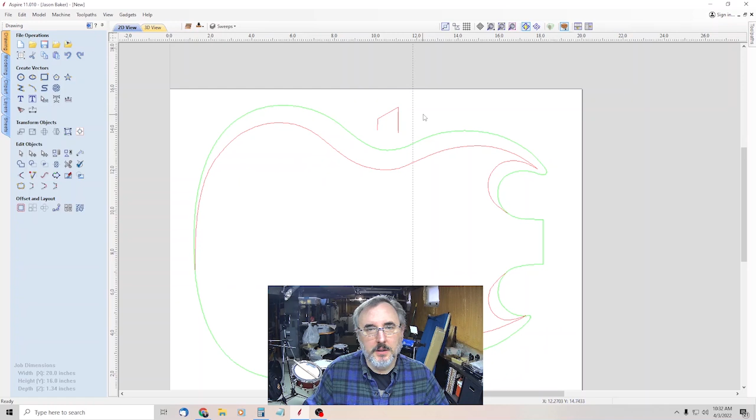If you remember in our last quick tutorial, what we did was take this cross-section profile and sweep it between these two rails. We had this type of shape, and then another shape with a much steeper angle, more like this.

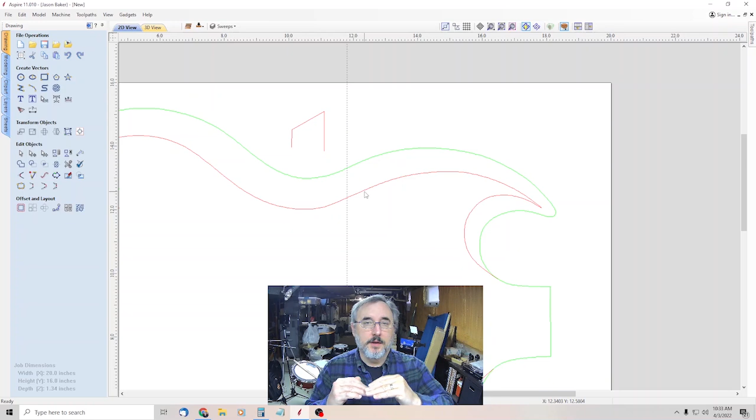Well, as it turns out, we don't even need that. What we're going to do is create another set of rails, but a little bit bigger, a little farther out from the edges. That pushes your 3D contour out farther so there's almost a margin. On the outside, that margin gets cut away and you get a nice smooth edge. Then on this side, we're going to create a little flat spot on top of this cross section and raise everything up a bit, and that will almost eliminate the tool mark.

So what we're doing is coming in more gradually this time with the tool, and it's even going to fix the ends here that were a little messed up at the start and stop in the last version.

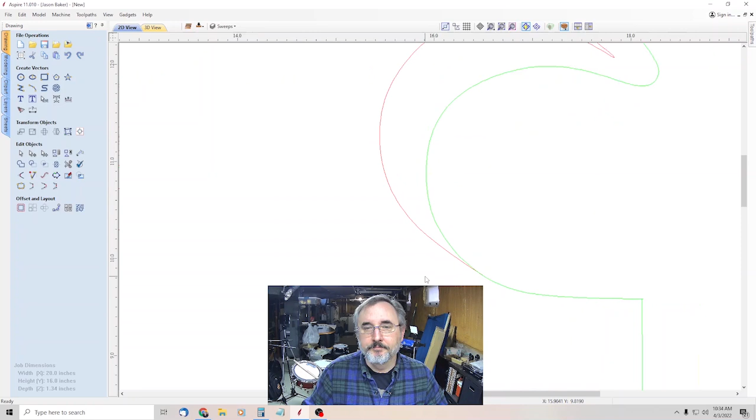Okay, so I've got my rails here. I'm going to turn off the outline so we just have our rails. I'm just going to do the top two again like before. Okay, now you got two separate. So now you come back over here to offset.

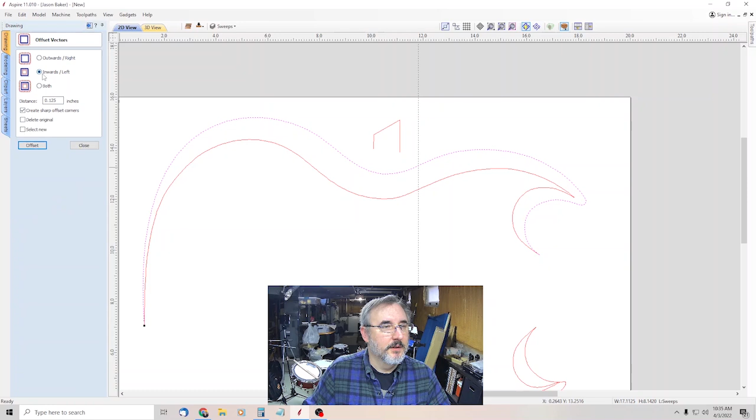I think you want to go outwards on this one. Nope, that's inward. It's strange, it can be confusing - you'd think that would be inward, not here, but apparently it thinks otherwise. So we're doing a 1/8 inch offset. Basically it just creates a new line. Then here, I think we need to do an outward offset.

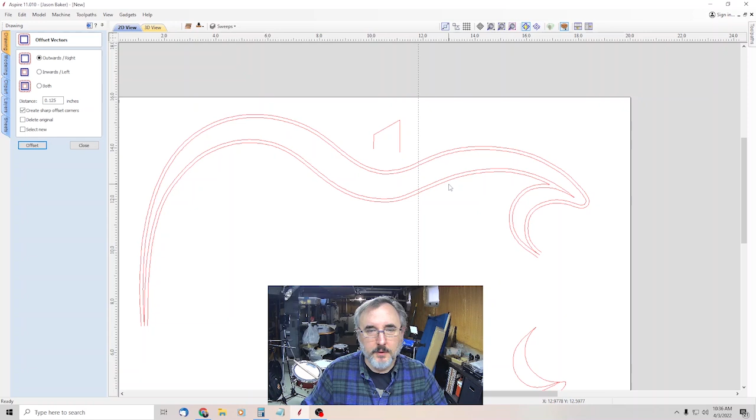Yep, okay, so what you've done is created two new lines to sweep between. You could even get rid of these if you wanted to, but I usually move stuff to another layer just in case I need it. So let's bring the outline back in. Then what you want to do is see where there's a huge gap here, but you want these to meet the outline.

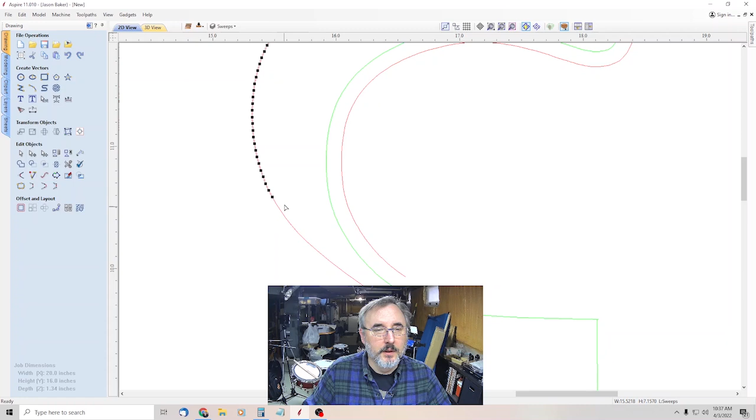What I ended up doing was - click here, you notice there's a lot of nodes, we're going to remove some of these. We'll cut vector, do the same thing here, right about there, cut vector. Because these curves, on this particular file I got from the PDF off of Electric Herald, are made up of a bunch of straight lines. But for this end part, we want to create a nice 3-point arc.

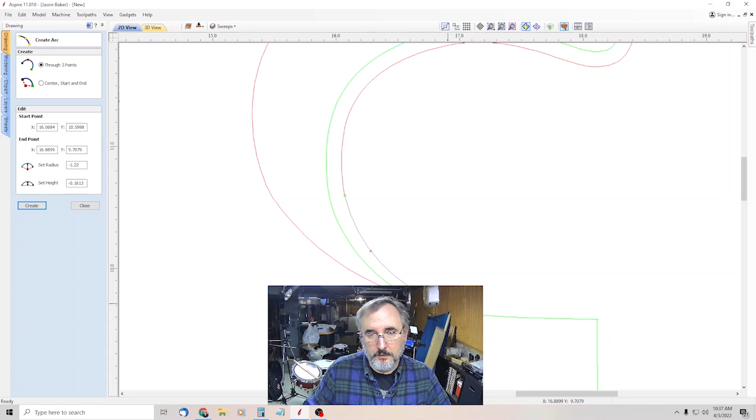So we're going to come right about there, and you want your end point to meet - see how these two end points meet. And then we need to stitch, join these together. So we'll join them.

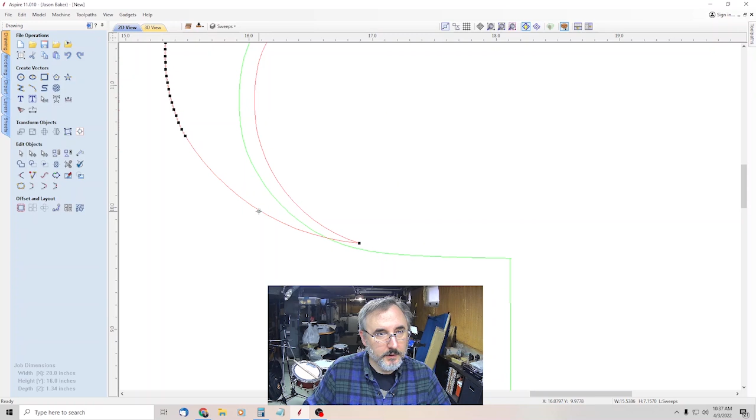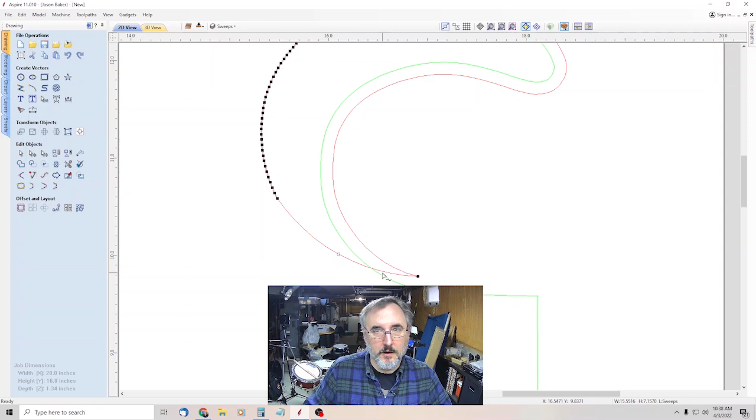This one's got a bit of a hard angle there, so we'll come out a little farther. Then this point, you actually want to push out a little farther, because I found that if this point is out right about there, it'll be cleaner - it'll start out here and then come in, making the beginning of this arc a lot cleaner. So that should be out quite a ways.

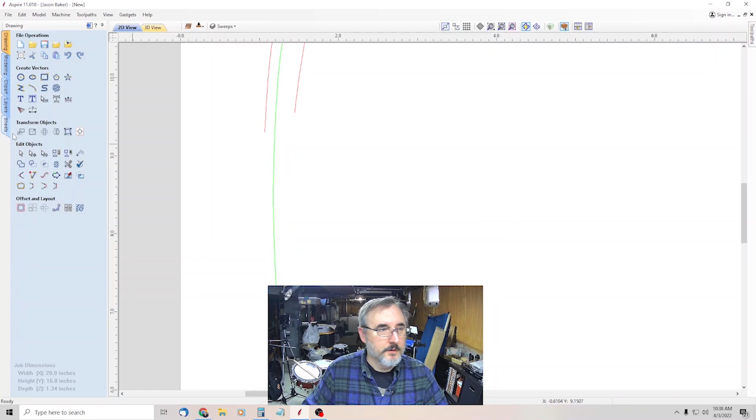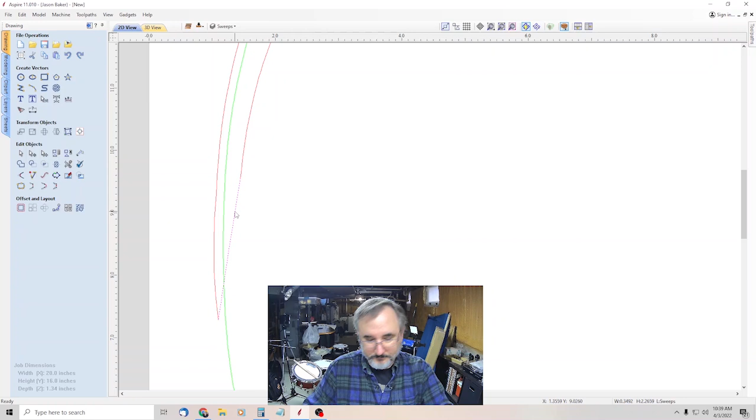Okay, and then you do the same thing on this side. We're going to cut these vectors off a little ways so we can insert a new 3-point curve, which will be easier to work with and cleaner. We're going to come right about there on that side. Actually, that should probably go up farther - I think we should go up farther because we want this curve to be nice and easy, nice and gradual. So we're going to come up here and cut a little more, because we want to come in right about there.

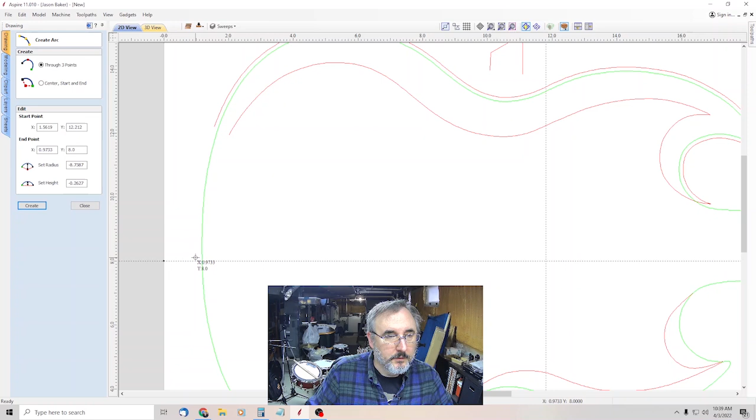So now we can grab our arc tool. We're going to end outside of this, and we can bring this in. That's the nice thing about the 3-point arc, when you want to move the beginning and end points. Okay, that looks pretty good, looks pretty smooth.

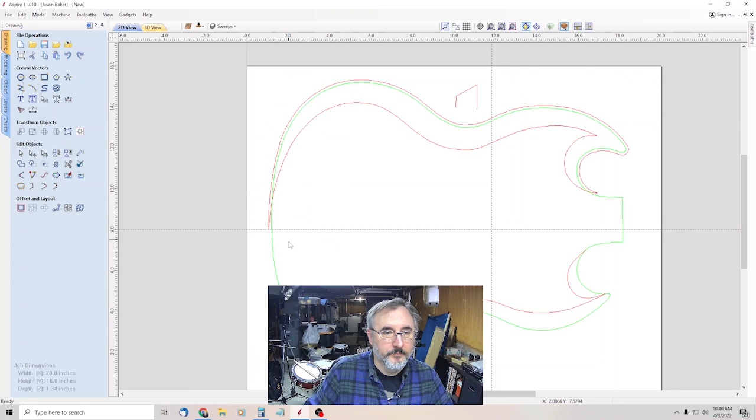We want to make sure these two are joined, and we do the same thing here. We're going to want to come outside of this, to here, snap - see, that's pretty good, a nice smooth arc. We'll join these two. So this falls outside and that falls outside.

See how this is where your body contour is going to cut, and your 3D contour will actually bleed out of there. So when this cuts, it'll have a nice sharp edge to it. Then another thing we want to do is our body thickness is almost 1 and 3/8 inches, so we're going to create a box.

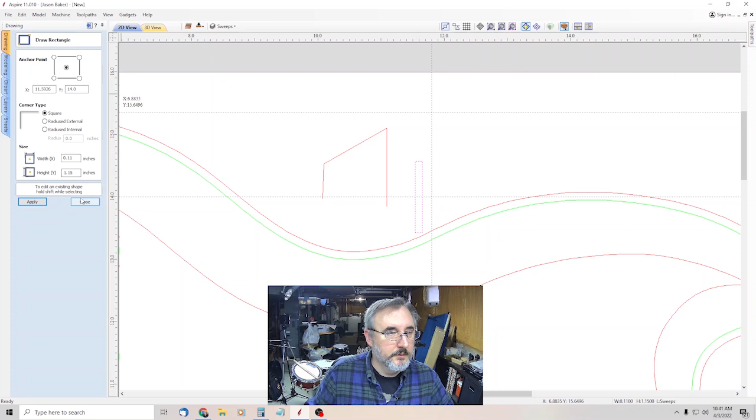Because we want this shape to be exactly the thickness of the blank material, so that's pretty good. It's supposed to be 1.34, but that should get us there.

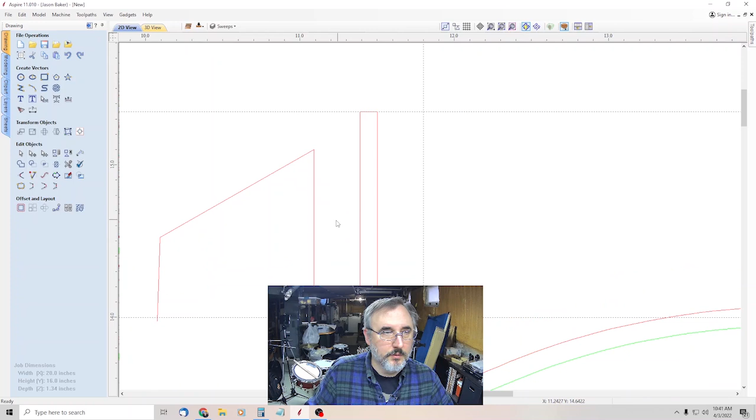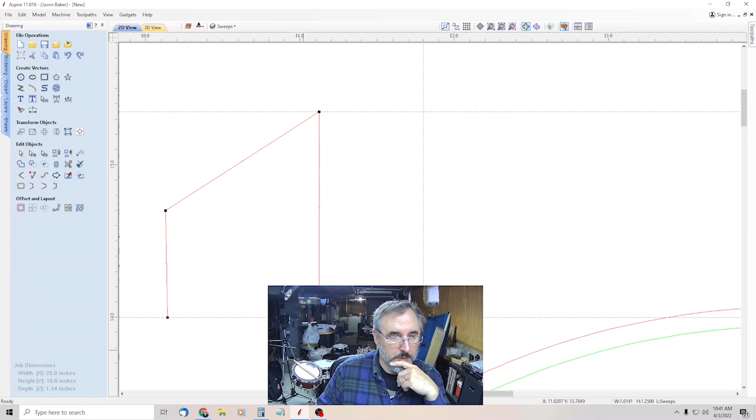And then we're going to take our old cross section shape, and first of all, we'll make this a little steeper, and then we're going to make it the right height. And then we want to create a ledge, a flat ledge up on top, just a little bit of one.

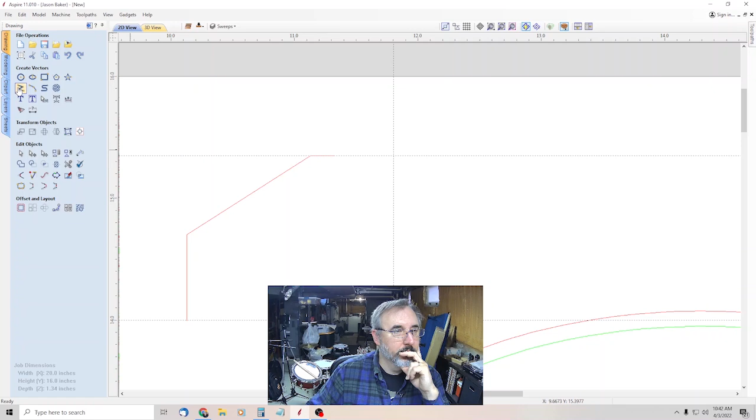And then redraw your ledge. Okay, so then this becomes our new profile. Get these guidelines out of the way. So this is half, and this line might actually be a little steep, but anyway, for the sake of this, it should be okay.

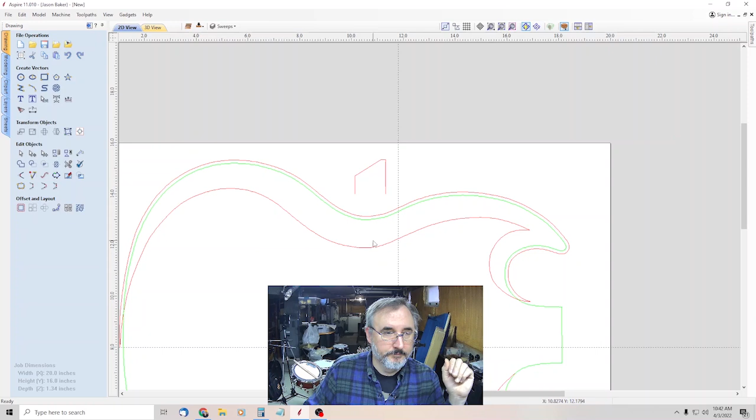Okay, so you got this little ledge here that's flat. That's going to be up here. It's going to be the flat spot, and then this is going to be your angle. So now we just do what we did before.

Which is to select the outside first, then the inside. We go to modeling and we go to create shape by sweeping, use selection. And now see, this sometimes happens, and I haven't been able to show it yet, but see the arrows are going two different directions. You want the arrows to be going in the same direction.

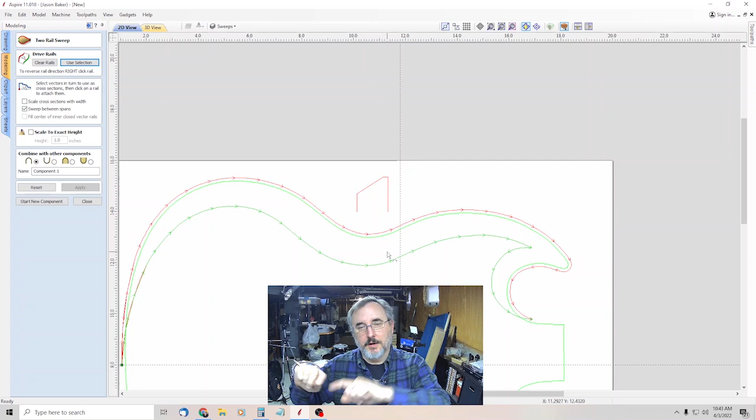So you right click on this one and go reverse rail. See, now the arrows are going in the same direction. Because when it sweeps, if the arrows are going in two different directions, one part of the contour will sweep this way, one part will sweep that way, and it'll actually twist your cross section. So now you've got both of these going the right way.

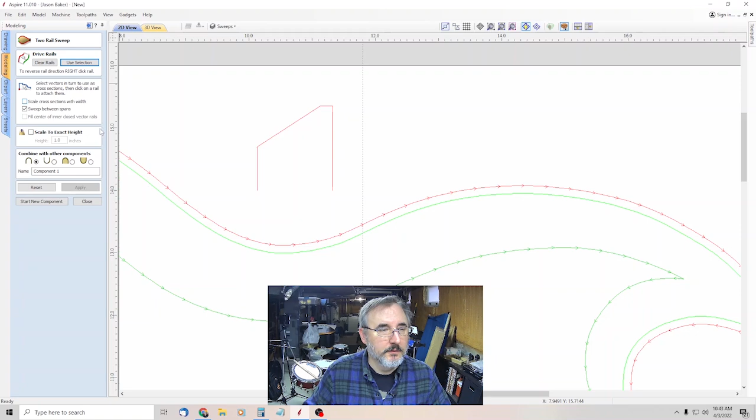And now we want to come over here, select vectors to use for your cross section. You want to sweep between spans. You do not want to scale cross section, that'll really mess things up. And then you want to click this.

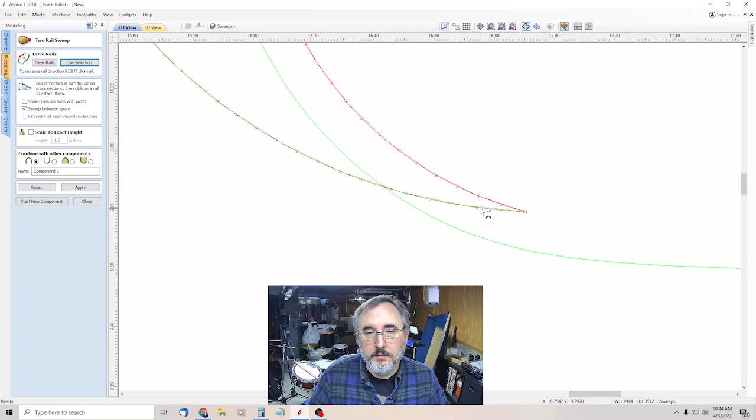And like we did with that real steep angle cross section that we're not going to use anymore, you start way in here. And like I said, you want to make sure this red dot corresponds with the outside dot, which it does. And then you just want to sweep, you just want to add a few sort of waypoints for your cross sections to sweep.

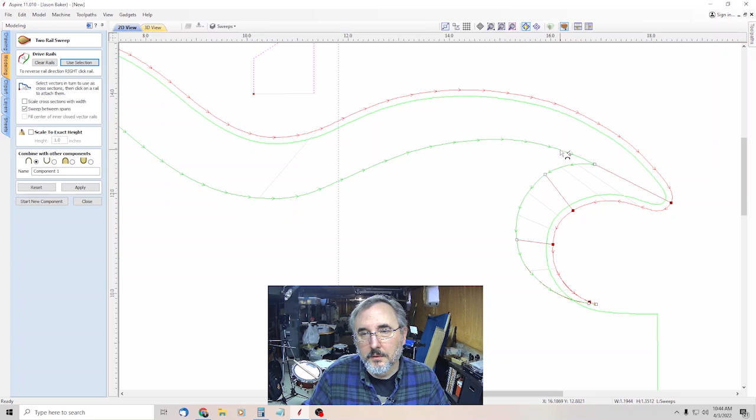Just to get these angles correct so that it will follow that contour the right way.

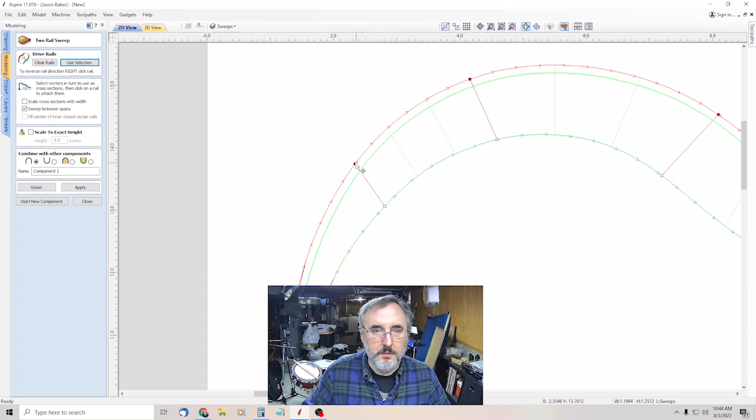And then you just do all the way down into the small part, and we'll do one more with the horn. Okay, so there you go. There's your rails. Hit apply. You can see it's a nice clean shape.

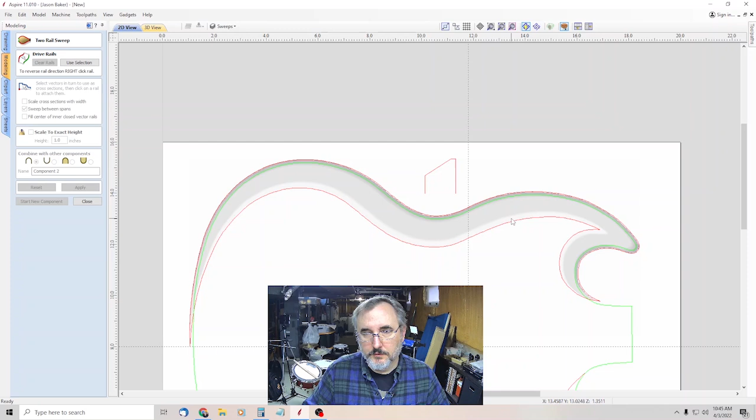Hit start new component, and you can see the ledge, the little ledge here is this real light spot. And then you can see how the end of the shape bleeds out. So this is where your cut line is going to be for the body.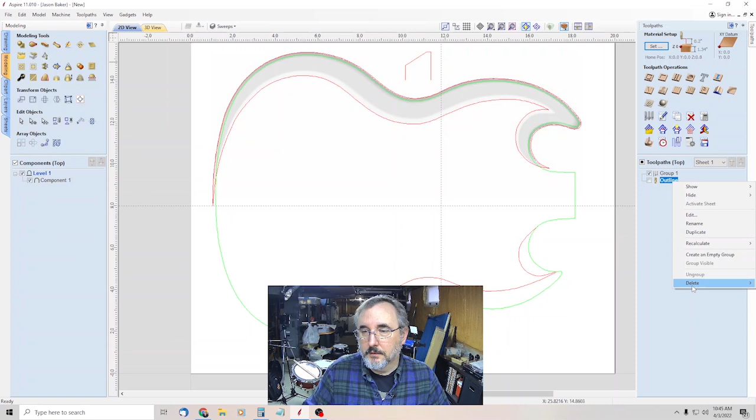So we'll throw that tool mark or tool path in right now so you can see that. Oh, I actually have one in there, I was messing around. Oops, delete and delete. Okay, so we'll click on that. Toolpath.

1.34 is our material thickness. Model thickness exceeds material thickness, that happens sometimes, and it is a little bit bigger. So we can just set it to 1.34. That's fine. Usually it's a good idea to keep your model, and when it talks about your model, it means this 3D contour. So basically, because we didn't get this exactly 1.34 inches, it's complaining.

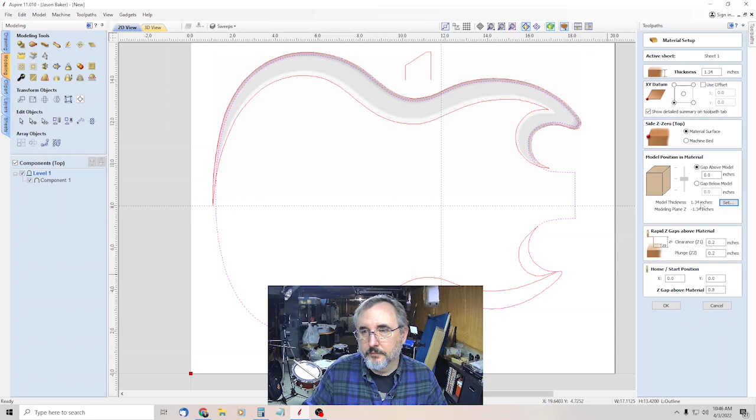So you just force it to be the right thickness. See, now your model thickness is 1.34. Okay, so we're good there. Okay, so we go outline. Oops.

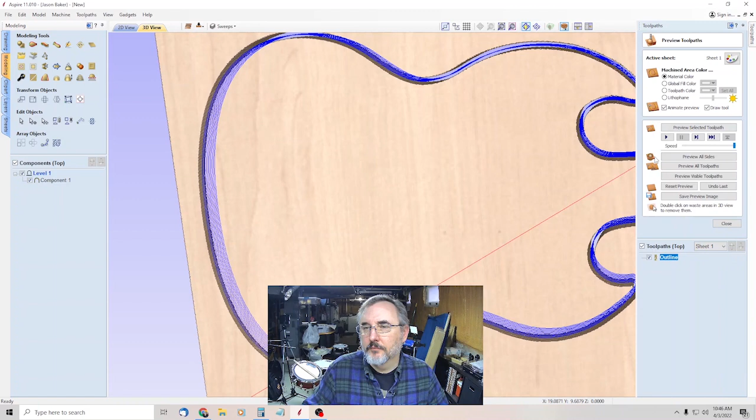Calculate. It says, oh, you're going to cut through. Yep, we know, we don't care. Looks like I have some open geometry here, I'm not sure why, but that's okay. Yeah, okay, that's fine, it's still cut.

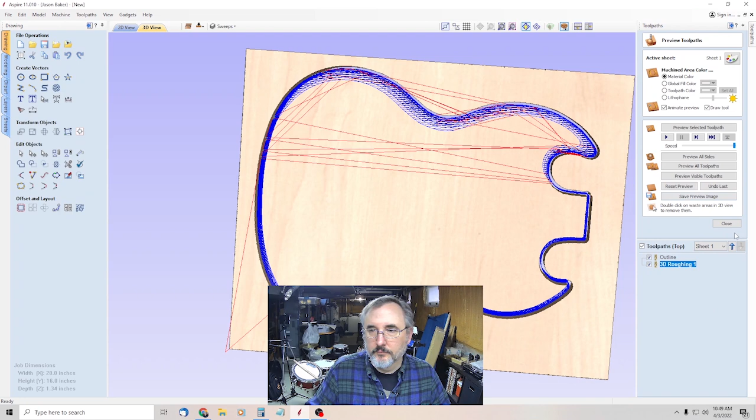So now you want to come in here to your contour, click that, and then do 3D rough, calculate, close that, 3D finish, calculate. I always reset preview all sides. Okay, so now you can see you get, well, actually let's delete this, move that.

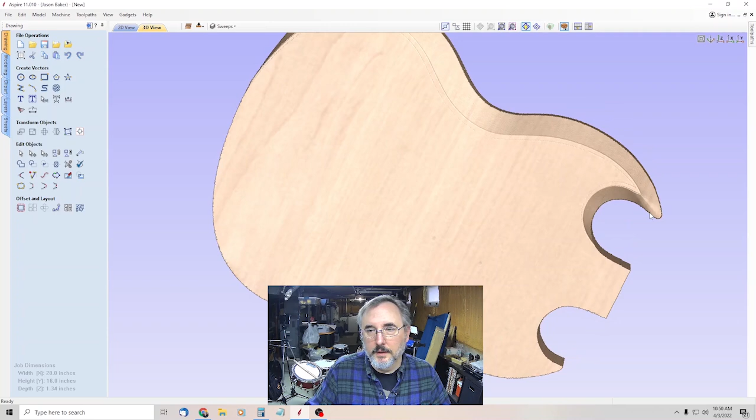Okay, so as you can see, this is a really nice clean edge, really nice. And then we've got a way better, there's no tool marks where the tool starts and stops here or back here. See how nice and clean that is compared to the one we did the other day.

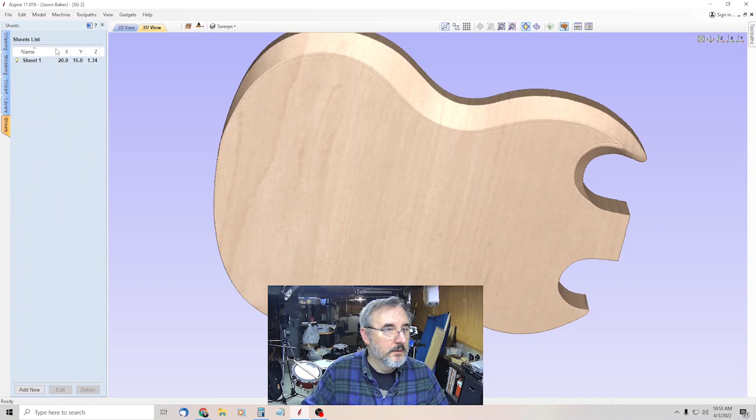Let's turn it around so you can see it. I keep forgetting that my picture's down there. There you go, so see how nice that looks? We'll give it a mahogany. There we go, now it looks like an SG.

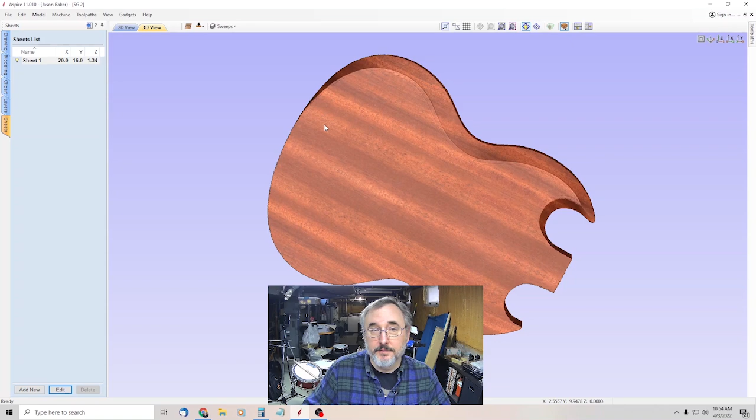Yeah, okay, so there you go. There's a quick one to sort of explain how to get that a lot nicer, and we're only using one cross section. We don't have to use those other cross sections, so it really works out a lot nicer. But I think this is way better, it's a lot better than our first attempt. I think this is going to make things a lot easier and create a lot less manual work.

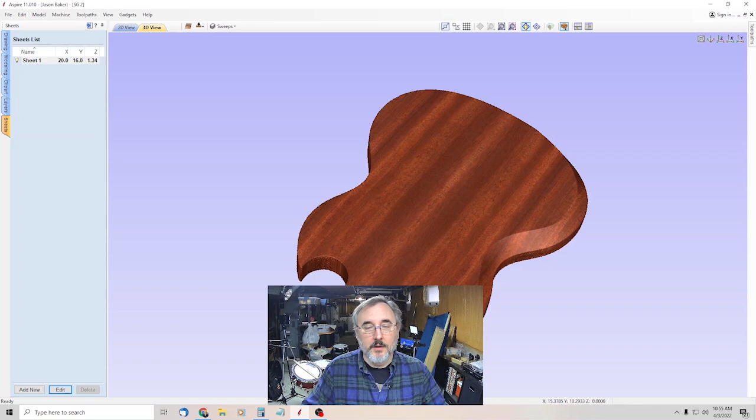And we can apply that to the Stratocaster design too. Then you should have a better contour, a better shape, and a smoother cut. So there you go.